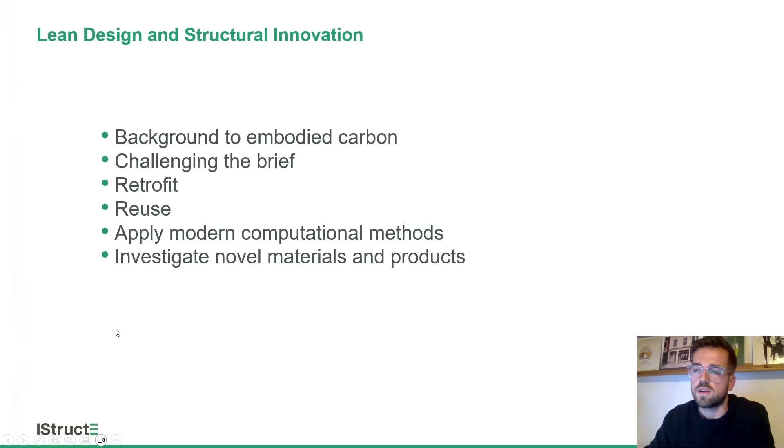So what's the primary aim? The primary aim is to reduce carbon. There's really no need for us to tell you about why we need to cut out carbon—there's an increasingly terrifying amount of information out there about the direction the climate's headed in, although perhaps not always making the headlines as it should.

As engineers, we're in a unique position to influence the future. To get serious about reaching net zero carbon emissions by 2050, we need to take serious action. We can't build our way out of this. The best way to reduce our impact on the environment, particularly with respect to embodied carbon, is to simply use less resources, less carbon, less energy. I'm hoping everyone will agree it's necessary from an ethical standpoint, but also various others.

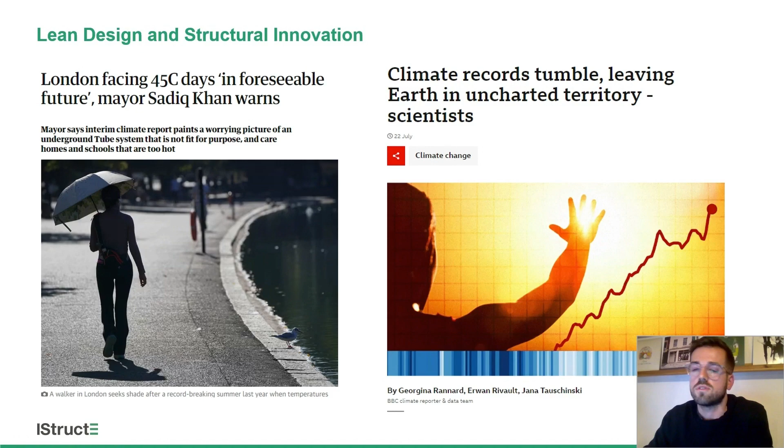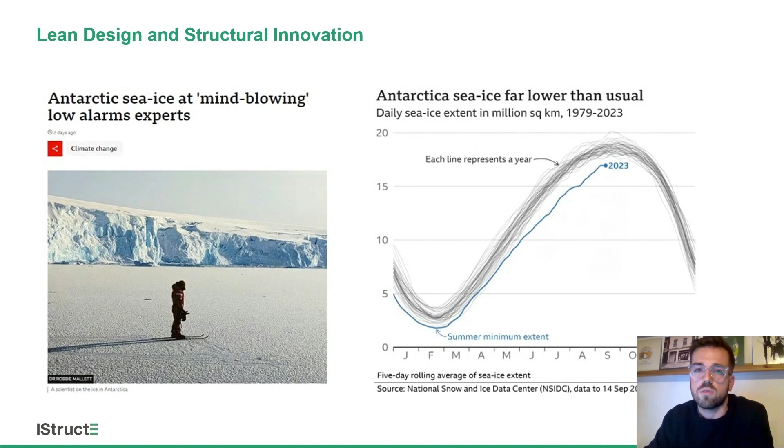So conservation of energy and carbon is now absolutely vital to keep global emissions down. We're at a critical point, and a massive amount of global carbon emissions are created by the construction industry. 10% of the UK's emissions are directly associated with construction, and embodied carbon will be responsible for almost half of total new construction emissions between now and 2050.

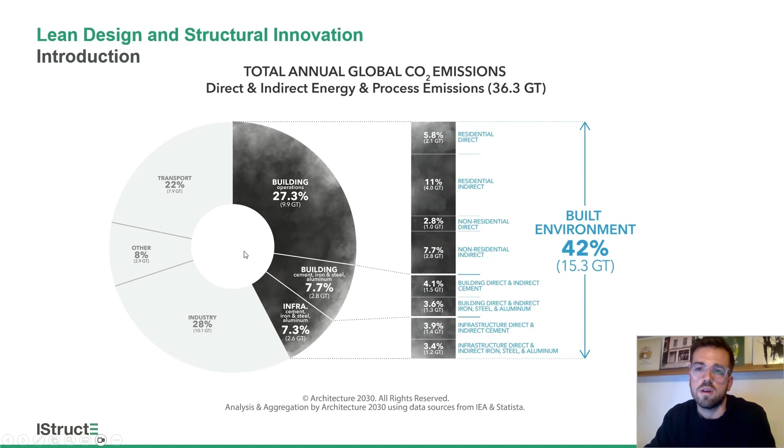So that gives you a bit of background to why this lecture is so important, and why we need to be focusing on embodied carbon at the forefront of our designs and structural engineering. There's an increasing number of industry targets to achieve for embodied carbon in designs and buildings.

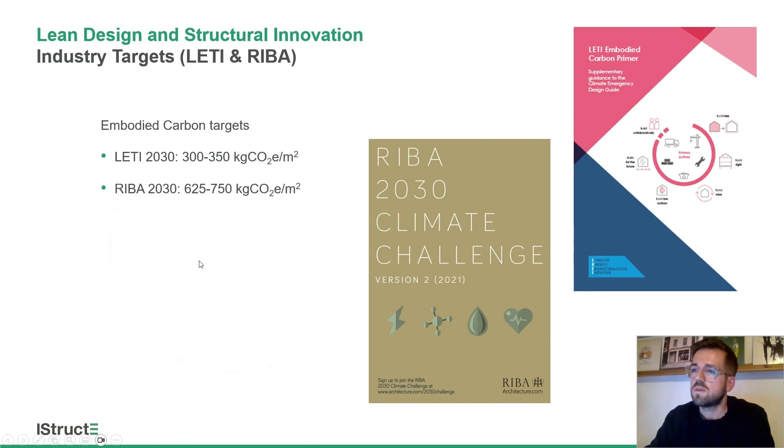LETI have set out a series of embodied carbon reduction targets, which are outlined on this slide, and I should add that these targets are for the upfront embodied carbon, sort of A1 to A5. So just bearing that in mind, on the next slide...

So to reach 2030 targets and beyond, how do you envisage the split being? Do you envisage it being the same? It'd be really good to get everyone's views on it, so I've made a poll, which hopefully is going to work, but I will ask it now.

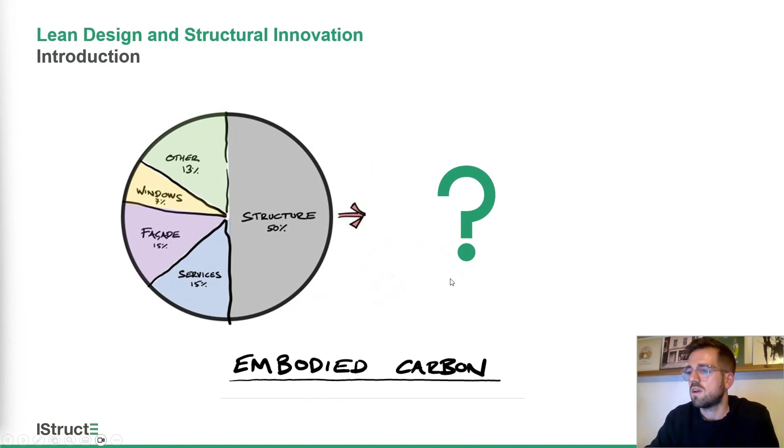So moving on. The first aspect of lean design that I want to touch on is challenging the brief. And this includes interrogating serviceability criteria as well. We need to be safe in our designs, and we need to be designing to code, but that doesn't mean we can't be challenging the design at the same time.

The IStructE publication, the Circular Economy and Reuse Guide, is really, really good. Download it if you've never seen it. It should be followed, definitely, and is very good for all of this information. But as environmentally conscious engineers, we need to be challenging client requirements where it's safe to do so, and where the code permits us to do so.

So that brings me on to this: where can we challenge the brief? Within the facade and internal partitions, are the facade contractors' limits realistic, and are they based on actual conditions, or are they generic, and can they be challenged? I'm sure a lot of you have found that designing to strict deflection limits is tough, and it means you make your structure a lot larger. You end up doing things to bring them down, but we need to challenge them.

And with partitions, can larger deflection heads and vertical joints be used as standard? Is that something that we can do? It's conversations we need to be having.

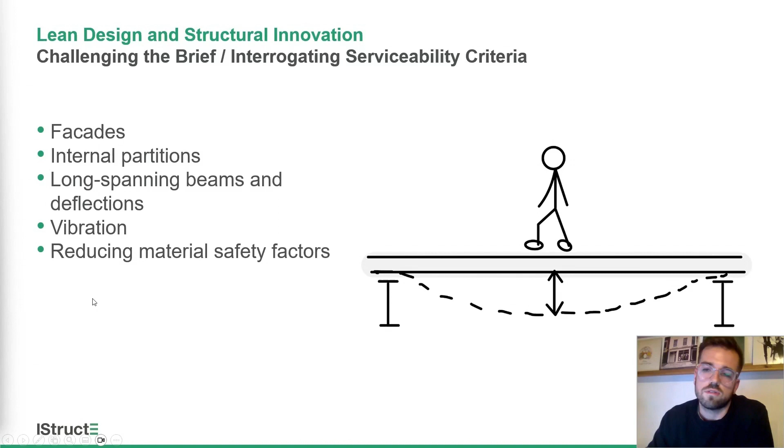It's vital that we have these discussions with the client, and the client is aware of anything that challenges normal design, but that doesn't mean we can't challenge them in the first place and bring up the discussion early on. The final thing I want to touch on is reducing material safety factors, and that's something Oscar's going to touch on towards the end of the presentation.

So the next thing, and it's a big topic, is retrofit. I personally think that the leanest design is a design that uses less material. So with that in mind...

What is retrofit? Retrofit is a word that is used a lot in our industry at the moment, but what does it actually mean? It simply means adapting, modernizing, and changing. Retrofit is just what we have and adapting it to suit our needs better. It implies a more technological change than renovation, but it isn't a new idea.

Reusing old stuff isn't crazy. Reusing old buildings isn't a new idea. If you walk along any row of theoretically identical terraced Victorian houses, if you live in London, you'll know exactly what I mean—loft extensions, rear extensions, walls that have been knocked down, new windows, and so on. As builders, we've always adapted our environments to better suit our needs. It's not something we need to be scared of. It's not a big, scary new way of thinking.

I want to use the next couple of slides to show that as engineers and designers, we already have the skills to do this. It's not a radical idea in many ways, but the application of it, and actually doing it, the result can be dramatic. So I want to talk to you a little bit about a case study.

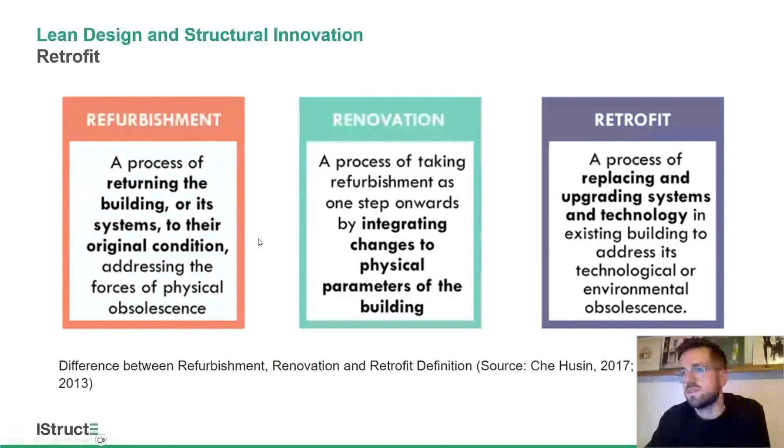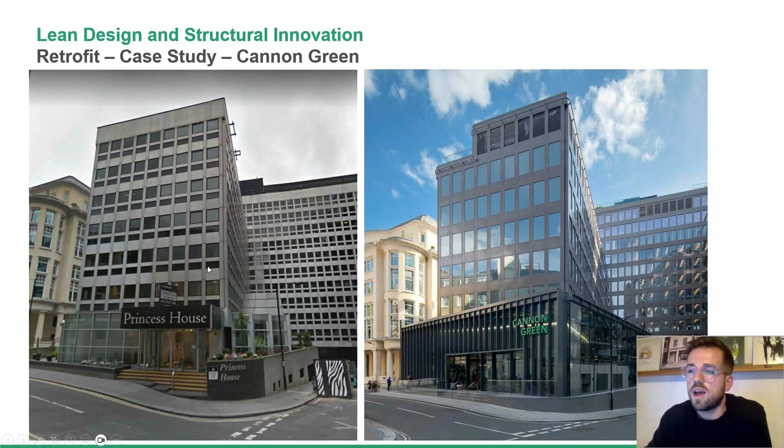It's a concrete frame building, and I'm going to refer to it on the next slide as well. What we did here is we added a couple of stories, added a roof terrace to the top, changed the use of the basements and the ground floor, added a bar and gym, and we also constructed a new sort of wraparound podium as well.

The first step and the most important step is to really understand the building you're working with. Undertake a really solid feasibility study. It needs to be carried out to gather as much information as possible. The appraisal of the existing structure is your friend, basically.

The key to understanding and unlocking a building's potential is to unpick and understand how the loads travel down through the building and into the foundations, both in the existing case and the proposed case, as you can see here.

Buildings need to be understood holistically, and it's pretty typical for buildings to have gone through previous lives. Columns might have been removed to open up areas, extend doorways, staircases might have been taken out or added in, lifts might have been moved.

So it's very important to understand the building. Original engineering or construction drawings, if you get lucky and find them, only tell a snapshot in time, and it's really important as an engineer to validate any drawings and any assumptions on site.

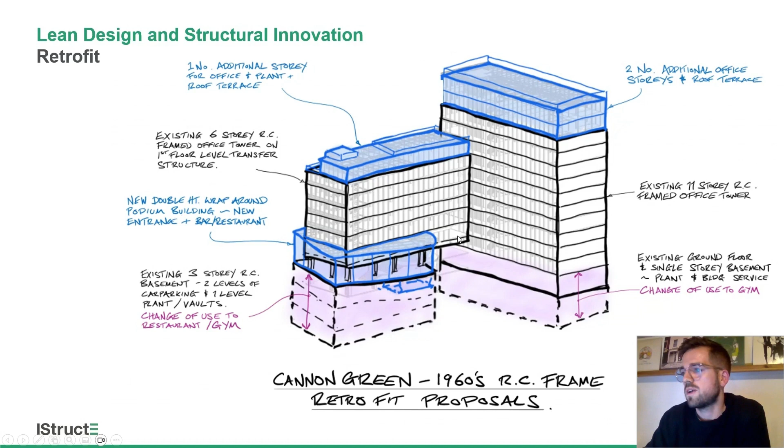So with the frame and the load path understood, a load takedown can then be carried out, which is the baseline for all future assessments of capacity and change. And that gives you a bit of a background about how to work with existing buildings.

The IStructE have a fantastic comprehensive step-by-step guide for structural engineers needing to check and report on the adequacy of an existing building or an existing structure even. If you're ever working on existing structures, this guide is your best friend, and it covers everything from stability to strength to dynamic responses and durability. Again, it's another document I'd recommend downloading.

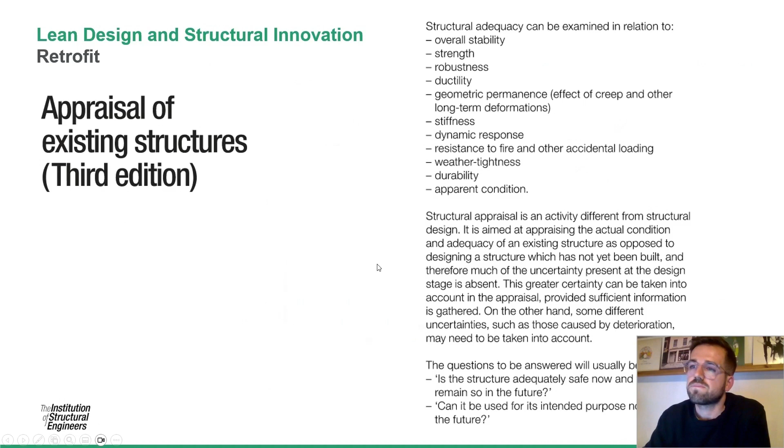So once we understand the existing building, the simplest way to justify any addition to the building or any sort of changes to the building is load balancing. If the proposals don't add load to a given structural element, or they don't change that element in too many ways, then by observation it's okay.

Existing loads like heavy screeds and partitions can be removed. The change of use going from a warehouse, for instance, with really high storage imposed loads and machine loads to a residential use might release 2 to 5 kilonewtons per meter squared of live load, which when you multiply up through the building, that's a lot of dead load. That's a lot of load that can be added into the columns and into the foundations, especially if you're going to be using a light method of building on top.

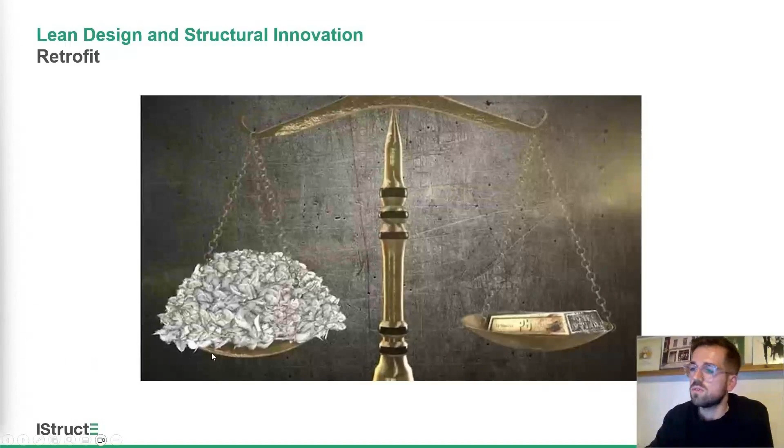So that's key to understanding the capacity of the building, what could be done. If you get lucky, you might have the loading allowances on old drawings, or you might find them on a plaque on a building somewhere. If not, you need to understand the time that the building was designed.

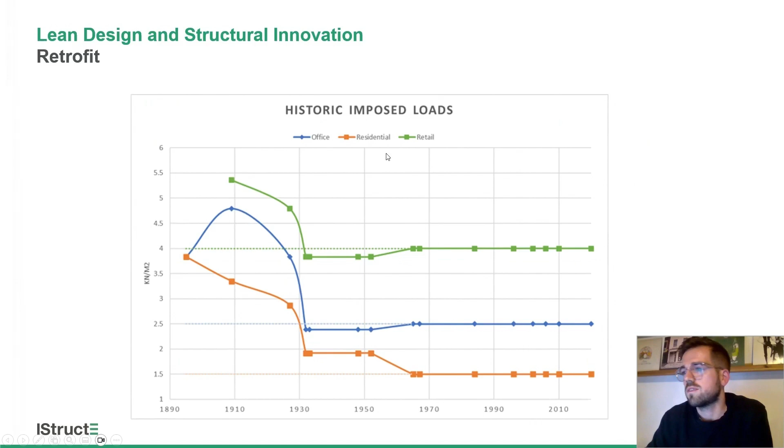The majority of the time, retrofitting a building will mean a change of load path or increase in load, at least to some aspects. You might end up strengthening foundations, columns, beams, slabs, something like that. But the result is a brand new building that's got an old building at its core. This massively reduces the need for new material, reduces the wastage of any old material, and hugely reduces the overall embodied carbon on the new structure. I'd like to think that this is lean design at its absolute best.

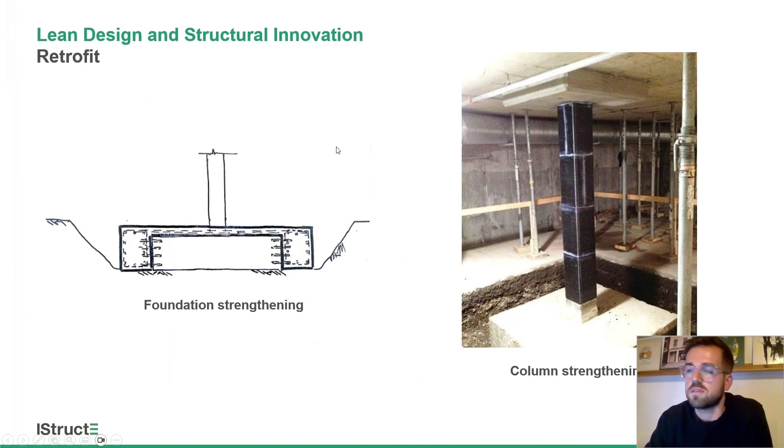So the next thing I'm going to touch on is donor buildings, which I only actually heard the term donor buildings about 6 months ago. We're also going to touch on steelwork reuse, but I'll talk about donor buildings first.

Going back to retrofit, you can't always build up or out of an existing building, and you might be working with a completely empty plot of land. With an empty plot of land, you've got a lot of options and possibilities.

But if you're building a new building, you need to work hard to make sure it's a low carbon design, which we'll come on to. One of the first things you should do is ask: are there any buildings we can mine material from? Maybe there's a site nearby, or one of your clients has another project where you could mine material. Are they getting rid of any steelwork? Or are colleagues working on existing buildings removing old steelwork, masonry, precast concrete, timber rafters, anything like that?

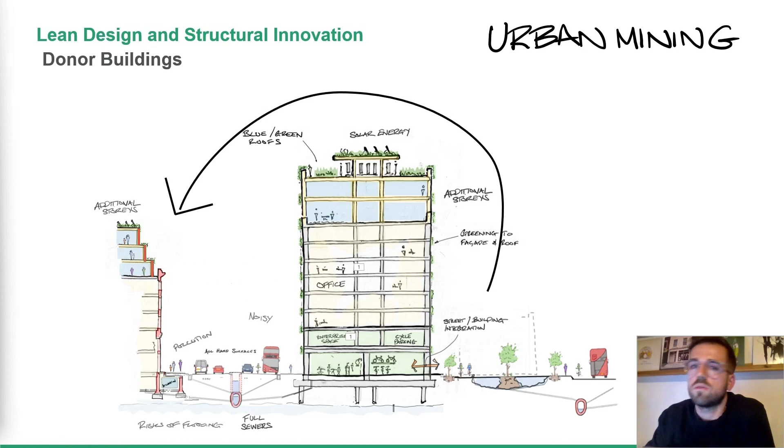These are questions we need to ask ourselves, especially with new buildings. I could go into a lot more detail, but we haven't got too long and I want to cover other items. I will touch on a case study, then pass on to Oscar, who's going to talk more about reusing steelwork.

I'm sure many of you are aware of how steelwork's made. In the UK, generally up until now we've used blast furnace steelwork, although we do use electric arc furnace steelwork, which is much less carbon intensive. We don't have many electric arc furnaces in the UK, or we didn't until recently—I think one's just been constructed. Historically we haven't, and when we do use it, typically it's been made abroad and transported in.

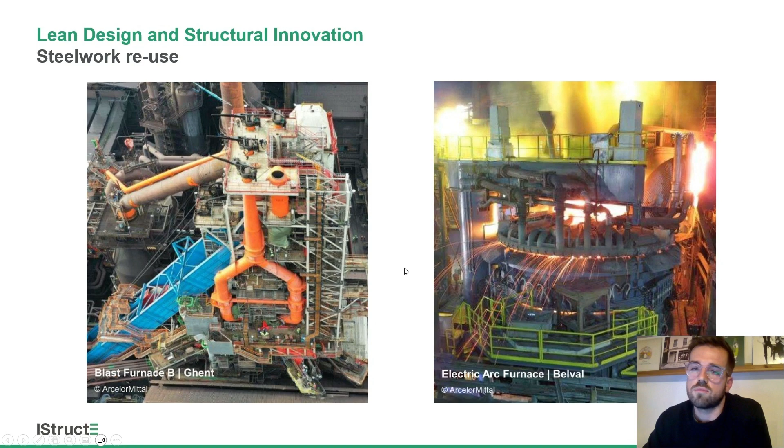X-carb, for anyone not aware, is an ArcelorMittal product, similar to electric arc furnace but using renewable energy to help power the process, so it's not very carbon intensive.

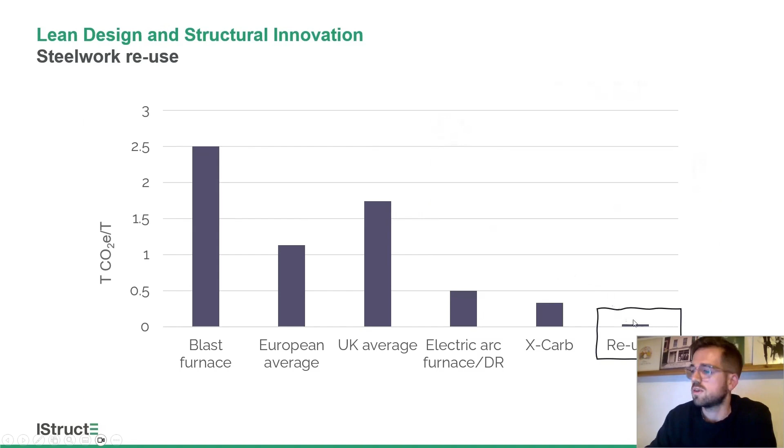However, what I really want to point you to is reused steelwork. If you're constructing a building, or part of one, out of reused steelwork as opposed to any of these other forms, your embodied carbon is tiny by comparison. It's something we should be looking at wherever we can, all the time—anytime you're installing steelwork, think: is there any steel we can reuse?

I'm going to talk briefly about another case study: 318 Oxford Street in London, a 1930s steel frame. Going over it quickly, it was a big retrofit where we essentially removed part of the structure, shown here in red, added 3 more stories, and constructed new structure in between, with a new core going up to act as the stability system.

What this means is that all of this removed steelwork had a chance to be reused, and so we did, which I'll come on to.

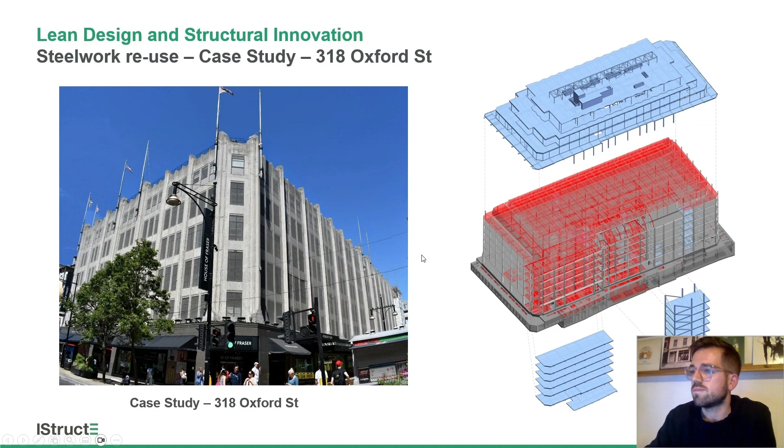This is a picture of 318 Oxford Street being constructed. On the left you see all the steelwork going in, a very nice picture. This is a picture of some really safe construction methods, also on 318 Oxford Street, but I don't think we're doing that today.

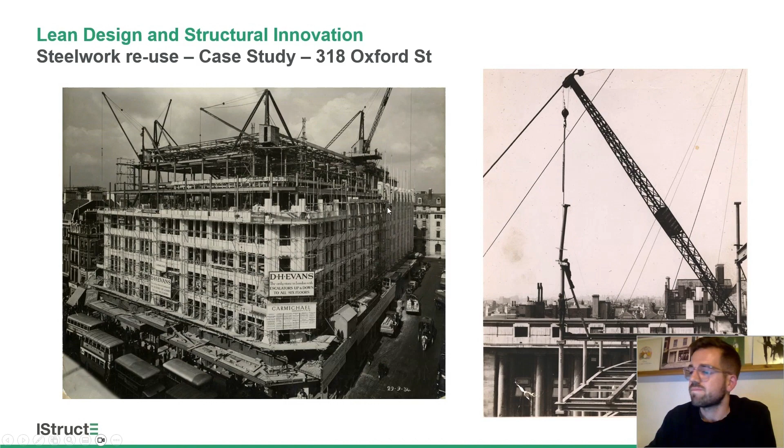So this is what we did. Some of the structure you can see here in orange and green was removed and reused on another site in London. It's now constructed, so it's living proof that it could be done—and it has been done.

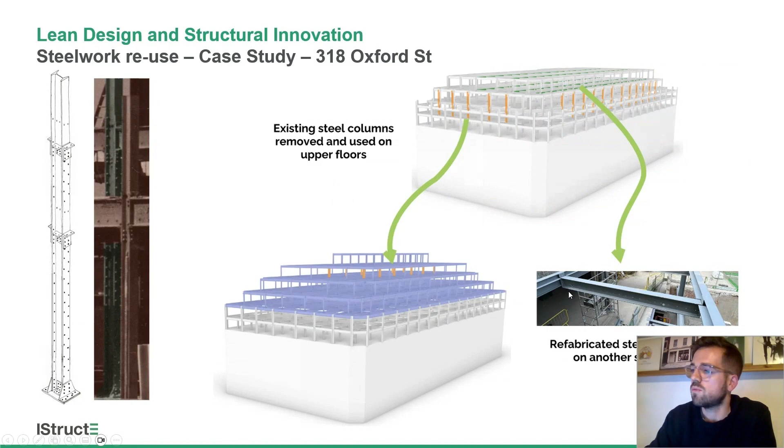Oscar's going to touch on it in a second, but essentially the steelwork was removed from the building, stored on site, taken away, tested, refabricated where needed, cleaned up, and then installed on another site in London elsewhere.

So what worked with this? It was identifying the opportunity early—being on site, noticing all the steel, and saying, right, there's a lot of it here, we're going to be taking a lot out, it's big sections, we should be reusing it.

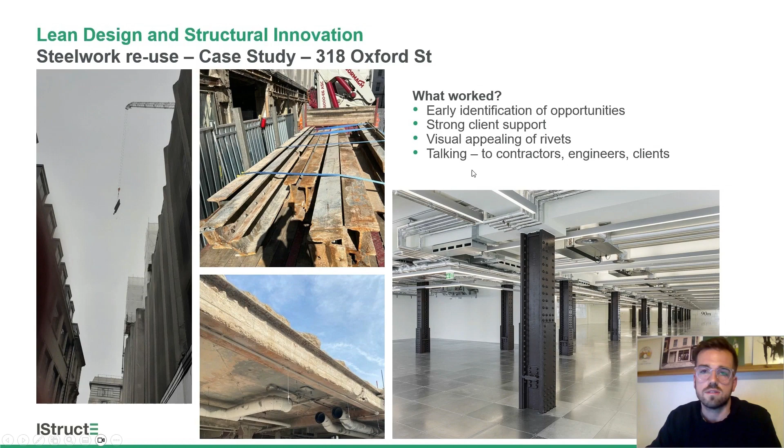Getting the client involved and making sure we had client support was vital, because at the end of the day you need sign off for something like this. You need to get it signed off. It was also visually appealing steelwork, so it didn't need too much work - it looked good.

After talking with contractors, engineers, and clients, getting everyone involved, it was something that worked, and has worked very well. What didn't work was the nervousness around 1930s steel - it's almost 100 years old, about 90 years old, and people were saying it's too difficult.

Although the steelwork looked appealing, there were a lot of plated sections. Some of the sections they had back then weren't big enough, so they ended up riveting plates onto them to make them stronger. This made it really difficult to reuse, especially as beams - for instance, how would you sit metal decking on top of a section that fluctuates by a couple hundred mil? It's tough.

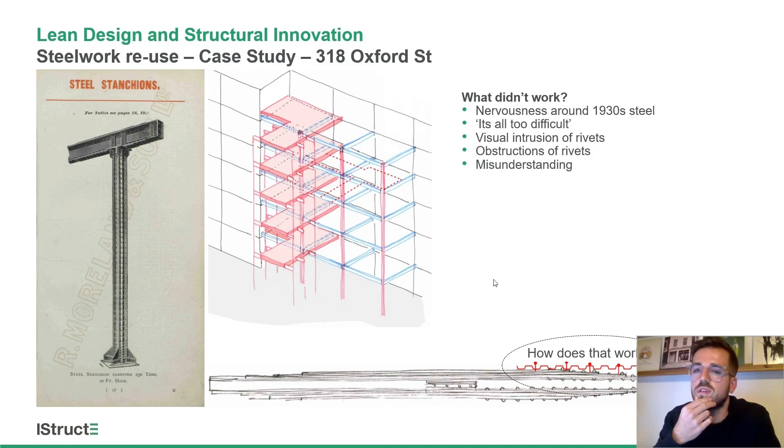So there were things that struggled, but it worked, and it's living proof that it can be done. But I will pass you over to Oscar, who's going to talk to you more about the guidance on reusing steelwork.

I'll take over now and discuss the technical side of how we can reuse steel from the past. The first bit of guidance introduced recently is by the SCI - it's P427, and this covers steel constructed since the 1970s. This is the first port of call engineers should look at when assessing previously constructed steelwork they'd like to reuse.

I want to emphasize the difference between reuse and recycle. Recycled steel is where the steel is melted down and reformed into rolled sections, whereas what we're looking at here is actually dismantling structures, trying to save as much as possible, and just forming new connections.

Going back to this guidance, introduced quite recently - what it basically sets out is a series of checks and tests needed to understand the material qualities of the steelwork, so we can be satisfied that it's up to scratch and meets the requirements of modern construction methods.

1970s steelwork being usable is great, but obviously there's a lot of building stock introduced before that which could also be utilised, like it has been on 318 Oxford Street. It's worth noting this guidance was only introduced recently, and the work we did on Oxford Street didn't have the benefit of this guidance.

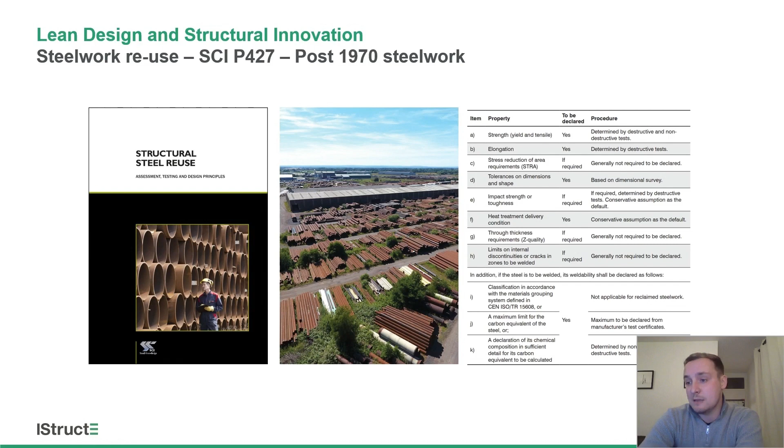What we actually did is create a series of processes to understand and satisfy ourselves that the steel we were reusing was acceptable. This guidance is particularly useful because it allows steelwork to be CE marked, which allows it to be sold and bought on the open market. Since we weren't selling or buying on the open market, we didn't need that CE stamp of approval, which is why we weren't relying on this guidance.

There are a couple of limitations to how we can use this. The consequence class of the structures you're using this material for can only be class 1 and 2. It also doesn't cover built-up members - typically in the past you'd have a basic rolled section augmented with plated members, and that isn't covered by this guidance.

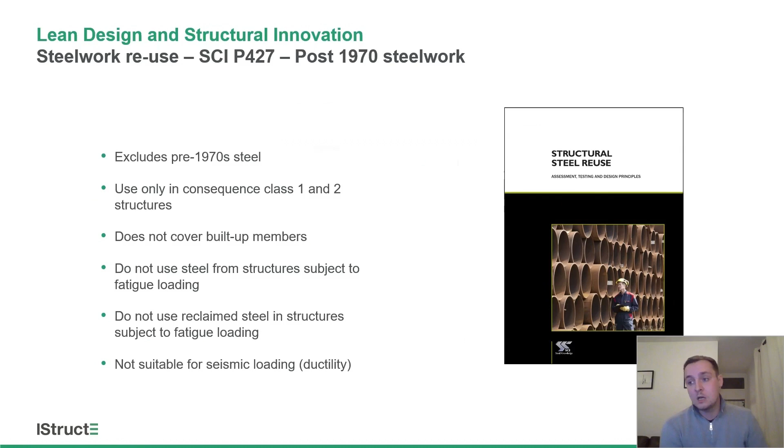It's also important that we don't use steel from structures subjected to fatigue loading, so things like bridges wouldn't be suitable for reuse. Likewise, we cannot apply this material to structures that will be subjected to fatigue or seismic loading. For steelwork before 1970, we already have a supplement provided by the SCI, which provides additional checks and tests beyond what's set out in P427.

I'm not going to go through the details of this, just so we can cover as many different opportunities and exploits in terms of lean design and reducing embodied carbon, but you should be able to get hold of these guides and read through them in detail to understand how to apply them to one of your projects.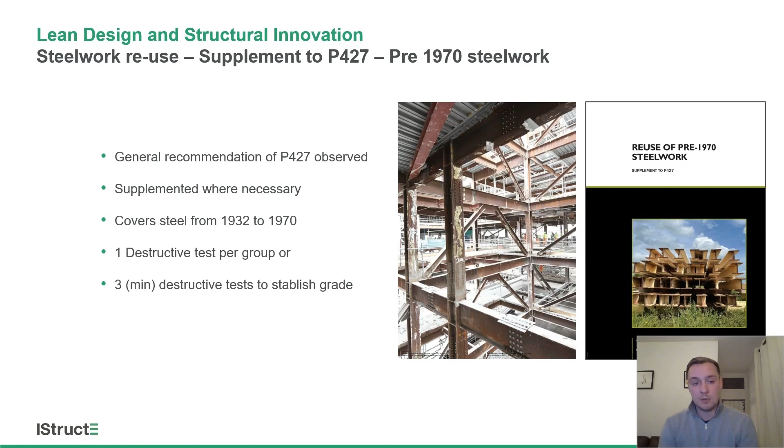The next thing I'd like to discuss is the load testing of piles. This is quite a common practice already in the industry, but it's worth touching on because of the real tangible benefits you can get from using load testing in piles. The reason is that when you load test piles, it gives you access to potentially lower factors of safety when designing your piled substructures.

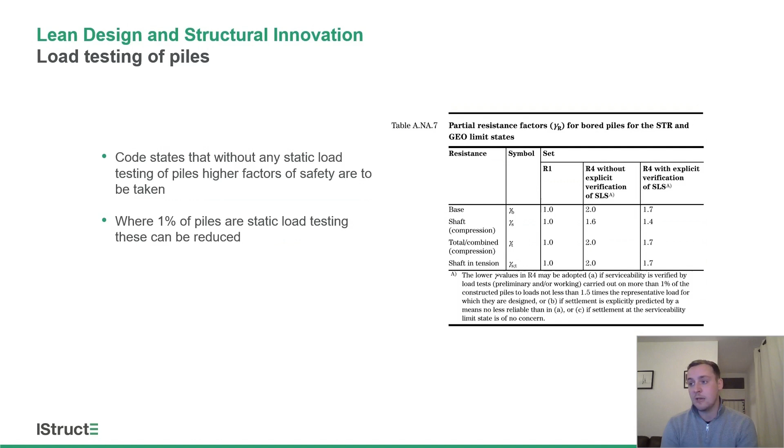The reason is you're essentially gathering a higher resolution of information about the ground and the piles being installed than you would with a more broad brush phase 2 approach. So it's all entirely safe and thought out - you're just getting more information, so you're able to get a leaner design.

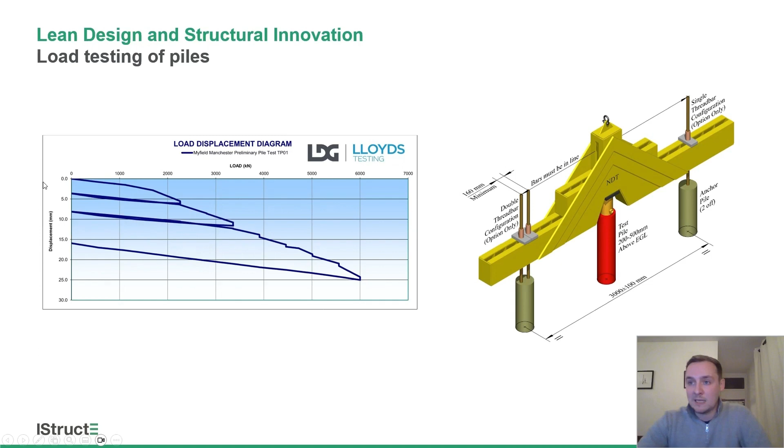On the third set of loading, it reached 6 meganewtons, and we see that the final pile displacement went from 25 mil under full load back down to approximately 16 mil, which shows the consolidation of the soil. You're not expecting it to go right back down to 0 once the loading's been taken off.

So like I said, we did this on a previous project. We do this on quite a lot of projects, and I think the advice I'd give to everyone here is if you have the opportunity to do this, I would push for it and lobby with the client to get it done.

We had a bit of time to play with, but we also had to make a meaningful start on site due to planning conditions. That is where pile load testing is a particularly good benefit or good option to take.

The tangible benefit here is that the pile diameters for the original scheme were designed to 750 millimeters, and based on the reduced factors of safety, we were able to drop that to 600 millimeters in diameter, which corresponds to approximately a 36% reduction in embodied carbon and volume of concrete in those piles. When you compare that to the total share of embodied carbon for the whole scheme and structure, these are really tangible benefits.

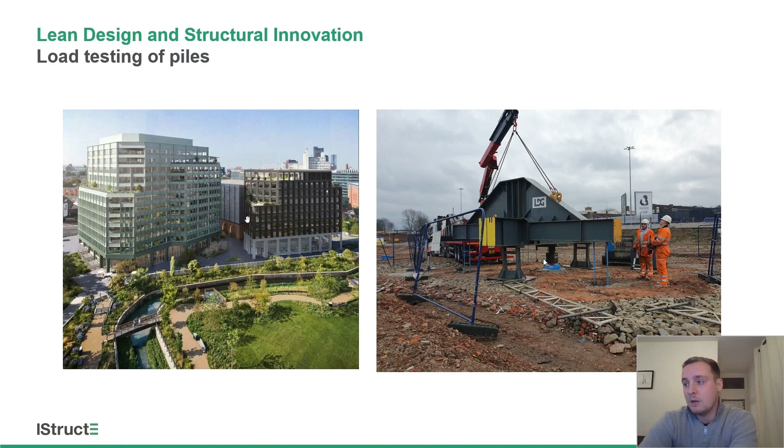Going on to how we lobby this to the client, there's a good correlation between cost and embodied carbon in this situation, because we're simply looking at reducing material. Obviously there's an initial capital cost with doing the works - you've got the mobilization cost, the time cost of bringing equipment to site, piling, and testing. But when you have a project with program flex and scale, this is often a very attractive strategy to employ.

The next thing I'd like to discuss is applying modern computational methods to our designs. This is something I believe we can apply to much more than large mega projects with super complex geometry. I feel there's a place in quite a lot of different design situations for structural engineers now, so it's something I quite enjoy investigating and advise everyone gets an understanding of and an interest in.

Now this is only showing 3 axes, so that would be x and y, which would be your variables that you can control. But quite often in design situations we have many more inputs and variables that we try to balance against each other to find the optimum design.

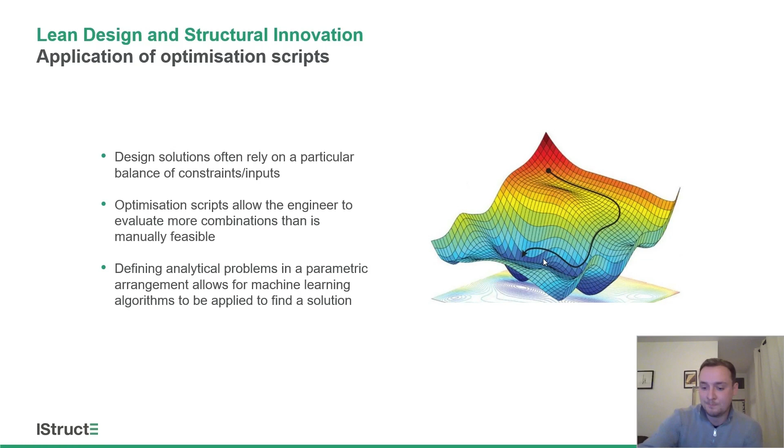So what we wanted to do was figure out how we could optimize the steelwork tonnage for this. In order to do that, we actually defined the geometry of the chimney. We had certain constraints we had to work to with regards to the base diameter and the height, but we also had a lot of parameters that we could play with.

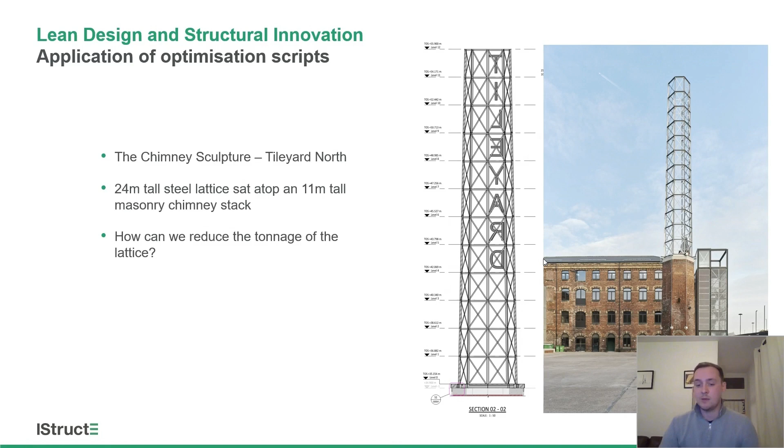And that's how we set up the parametric script that I'll show you on the next slide. On this slide, what you can see here on the bottom right is a Grasshopper script, and this is the kind of definition that allows us to define the geometry and then speak to the analysis package via this machine learning algorithm, which is set up via the Galapagos function within Grasshopper, an inbuilt function within Rhino 7.

On the screenshot with the GIF on the top right, you can kind of see this process, sped up. The left-hand window is showing the analysis program going through different design options, assessing it against deflection. And this central window here is that Galapagos interface I mentioned previously. It's working through a solver plot to try and find the optimum combination of inputs to minimize the steelwork tonnage.

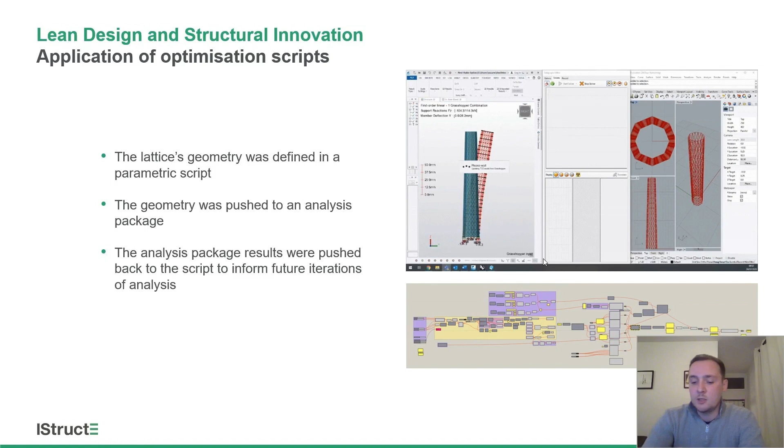Just going to touch on material innovation now. This first piece of material innovation is called Concretene. I've been very fortunate to be involved in this. This is essentially enhancing the material properties of concrete via impregnating it with graphene at the batch plant stage. The graphene is a two-dimensional material, and that allows these platelets of graphene to be dispersed throughout the structure of the concrete slurry. They then form a medium that allows the crystalline structure of the concrete to develop in a much more robust and structurally efficient manner compared to when that medium isn't present within the concrete mix.

The benefit of that is the crystalline structure is much more robust, which improves curing time - we're finding that you can get 28-day compressive strength within 24 hours. It also improves the compressive and tensile capacity of the concrete. This could be compared to GGBS, whereby you reduce the cement content of a mix and still achieve the same concrete grade, but also have the benefit of reducing that cement content, which is a massive component of embodied carbon associated with concrete.

This has similar benefits, but it doesn't have the delaying effect on curing time that's often an issue when using GGBS in a concrete mix. There's also benefits to the tensile capacity of the concrete when you use Concretene, and although it's still early days, there's indications that you can reduce the amount of tensile reinforcement required in elements designed with Concretene. It's worth saying it's currently looking like it's going to be viable around 2025.

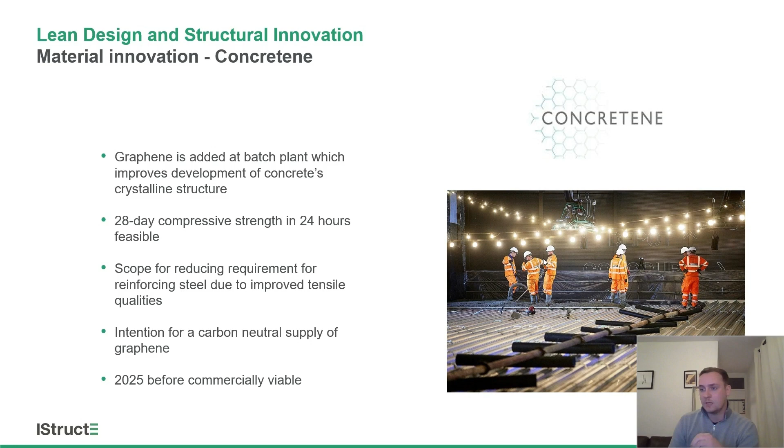Another interesting innovation on concrete is Carboncure. This is quite popular in the US currently, and how this works, in a nutshell, is it's essentially sequestering waste CO2 into concrete in a way that actually improves the compressive capacity of the concrete. This works by creating calcium carbonate by injecting waste CO2 at the batch plant, similar to GGBS or graphene.

The interesting thing about this is because the carbon is now sequestered in a mineral form, I think there's a good argument that when completing your embodied carbon calculations and comparisons, you can take this sequestered carbon as helping to reduce the embodied carbon of a proposal using Carboncure. Comparing this to timber structures, I think the current guidance is that you do not consider sequestration for timber carbon within the timber when comparing it to other options.

That's because at decommission of the building, it's quite likely that the carbon stored within that timber is then, in one way or another, going to get out to the atmosphere, either through organic breakdown or burning of that timber, whilst that's not something that would occur when sequestering the carbon in this mineral form through Carboncure.

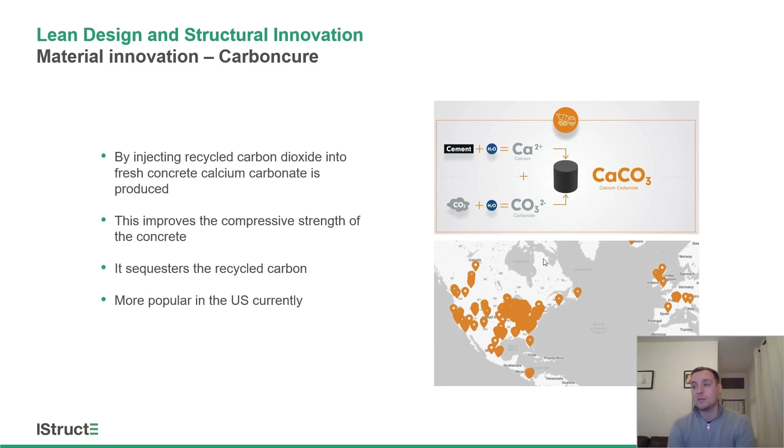So on to structural innovation products, the first one I'd like to discuss is the Minimass beam. This is really cool - precast elements that have been developed recently, and this is based on the Truc de la Fare bridge you can see in France, shown on the bottom right.

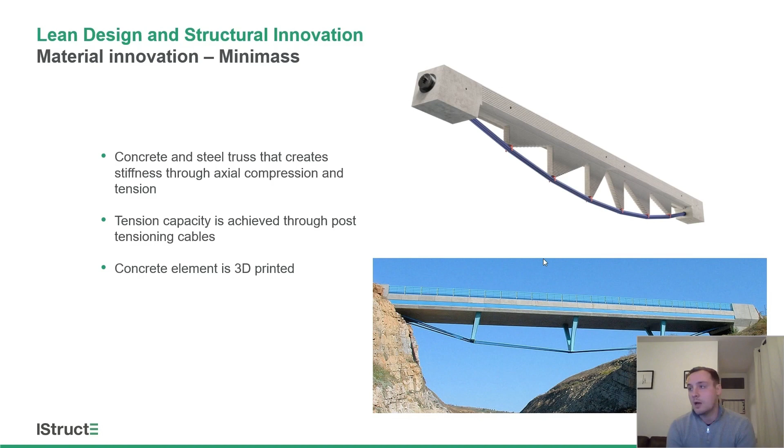This works on the basis of a tension compression truss. The compression element of it is formed with 3D printed concrete, and then you have this chord of post-tensioning, which is situated within a duct.

We've also researched recently the use of the CREE building system. This was first created in Austria, and we looked at applying this in Mayfield to see if we could utilize the sustainability benefits of this material, or this building product.

The way it works is you have a combination of glulam and concrete to form a modular construction method, whereby the system utilizes the benefits of the materials to form something that comes together in a really efficient manner. If you look at the downstand beam, formed of concrete, it provides the bearing of the prefabricated modules that sit on the glulam columns.

If you're familiar with timber design, you'll be aware that the connections of timber can be quite tricky and cumbersome due to the localized shear capacity of timber connections. Using a concrete bearing is a good way of avoiding that, but it also provides a good fire stopping break between floors. That's the benefit of the concrete used in that sense.

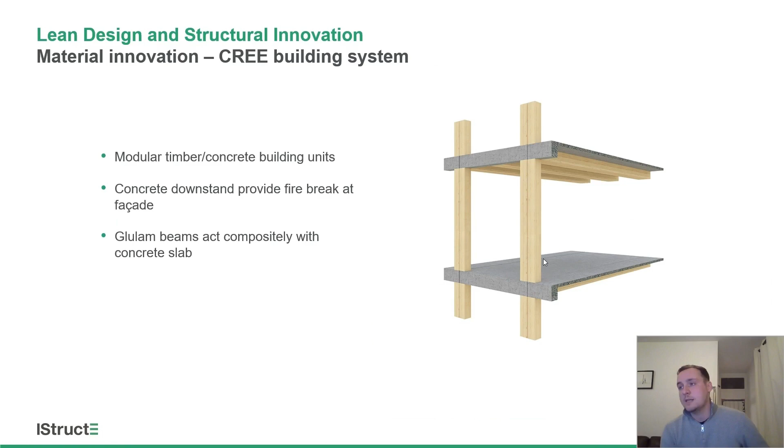And then you've got the embodied carbon benefits of utilizing timber. The timber is actually designed compositely with the concrete slab on top, and together it forms something that's quite program efficient and sustainable.

You can see here, this is one of the units being lifted into place. I just wanted to touch on and summarize these last two sections briefly, in that I've only taken a few options that we've researched and looked to apply in our building designs over the last couple of years.

The lesson I want to go through today is that these products, especially when you're speaking with representatives of companies trying to sell these products, you'll often be advised that this is the solution to whatever problem you're facing. It's absolutely critical as engineers that we understand how buildings are put together, and we understand the implications of adopting some of these new products that are being sold to us.

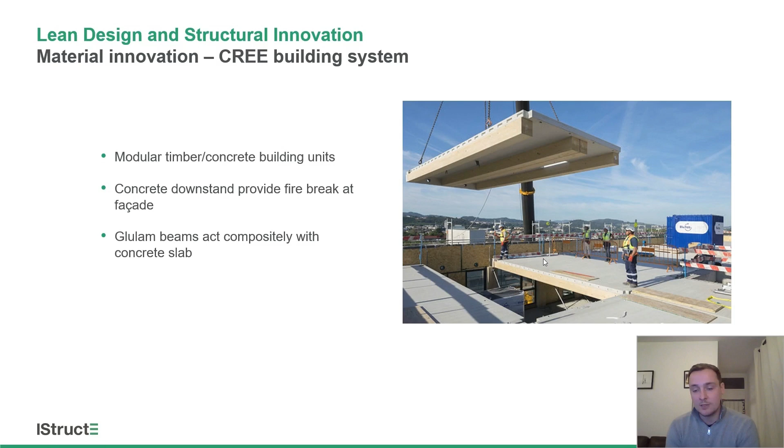So there is, without a doubt, really excellent applications of these products in design, but it ultimately is the responsibility of us as engineers to assess whether or not it's suitable in our specific designs.

So as Ryan mentioned earlier, we set out this poll, and it's based around what we believe the future carbon split is likely to be of structures in 2030. As Oscar just said at the beginning, I asked what percentage of upfront embodied carbon do you think is associated with the structure relative to other building elements in order to achieve future targets, and that was the poll that I put out.

So I've just published that, so you should be able to see the results.

Basically, it's obvious that we have an ever-increasing need to reduce embodied carbon in our designs as engineers. The focus of the industry has been on operational carbon for the last 20, 30, 40 years. And there's not as many easy gains as it stands for operational carbon, such as MEP and building fabric, etc. So the focus is now more and more on the structure, and until others catch up, it's going to remain this way.

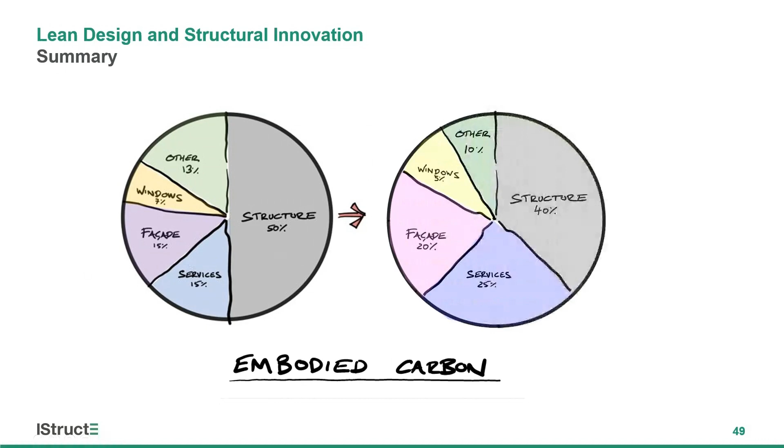Historically, the structure is made up of about 50% of a building's embodied carbon on average. Moving forward, it's obvious that we, as structural engineers, need to work harder to bring that percentage down. It's not just a linear reduction on the current split, because there is simply more opportunity, as we've just explained in the presentation, for us to reduce the carbon.

It is a subject to debate. The graph on the right is not set in stone, and that's why I asked the question, because I was intrigued as to what other people think. It's my interpretation, or our interpretation, that the structure needs to be down at around 35 to 40%, or even lower.

So what that means is we need to be working really, really hard to reduce embodied carbon, so that there's a bit of wiggle room for the others to be a little bit more carbon intensive, if that makes sense. And this is achievable assuming best practices are performed, and we adopt lean design, we challenge briefs, and we use our innovation to achieve low carbon designs.